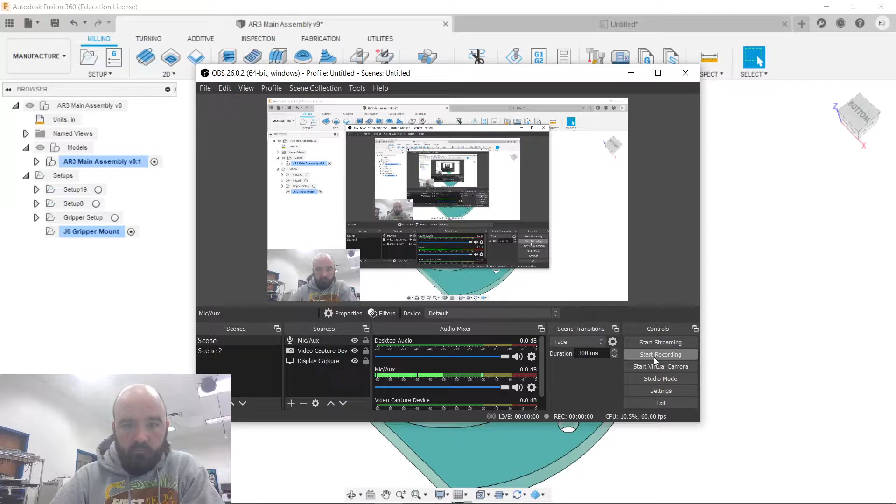All right. So what I'm going to try and do here is take a part from the body as designed to a toolpath that we can run in one of the mills. I'm going to try and do it all in one shot, all in one take. Here goes nothing. So we have a part here from the robot that we're building. This is the J6 gripper mount.

You can see that there are some features that are all accessible from the top, but there are 2 additional holes that we're going to have to go back and do in an entirely different setup. What I mean by setup is we're going to clamp a piece of raw stock into the vise, and it's going to be in this orientation with the tool working on it from this direction. So we will not be able to reach those holes on the side.

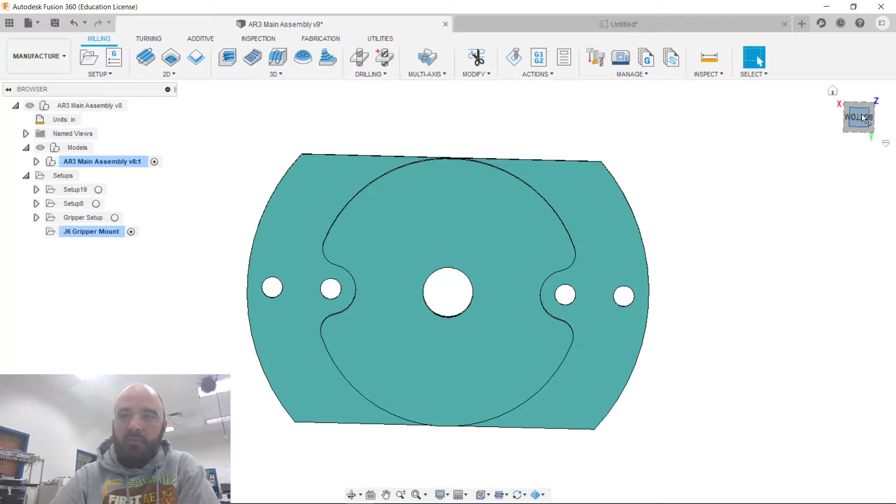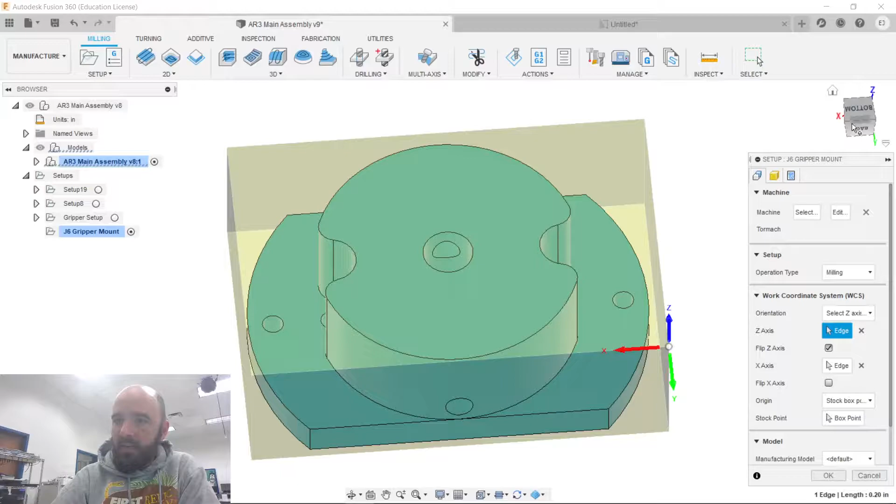So while we're talking about stock, in the setup, if we go over here to this little folder in the manufacture tab, there's a little button that says setup. So we created a new setup. I named it J6 gripper mount just so that we wouldn't lose it. We have to select a machine, the operation type. The machine I have saved in this computer as a Tormach, because that's the one that we're going to be using today.

Running down through the options here. The Z-axis, which is this blue arrow, we want that to be running up and down. We want that arrow to be pointing up specifically. The X-axis, we want to be pointing to our right, and the Y-axis, we want to be going away from us. So all of those things are correct. We want the origin. I like to put it in the back left corner. Some people work from the center. I like putting it on the stock box at the back left corner.

So the stock that we are using, and I know you won't be able to see too terribly well in the tiny little talking head in the corner, but there's a little piece of stock that I have already cut to roughly the correct height. So we know we're going to go to stock, which is the yellow thing. I'm going to go to fixed size box, and we're going to put in these dimensions.

So the X, let me put my phone on vibrate here.

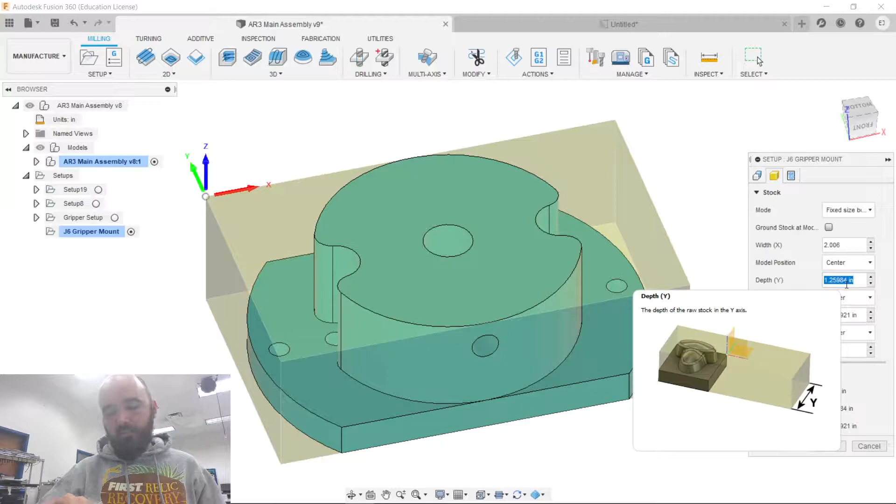The X dimension is our left to right dimension. So I'm going to measure that with our calipers, make sure that they're zeroed first. So the calipers are zeroed. And going left to right, which is going to be this way, we have a measurement of 2.006. So I'm going to put that in here, 2.006. The depth, which is our forwards and backwards position, we have a measurement of 2.062. And finally, the height, which is our up and down direction, we have a measurement of 0.976.

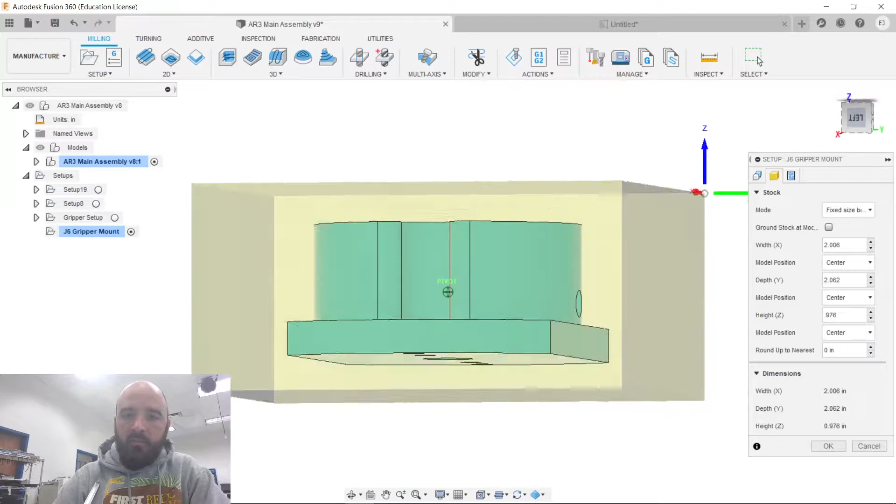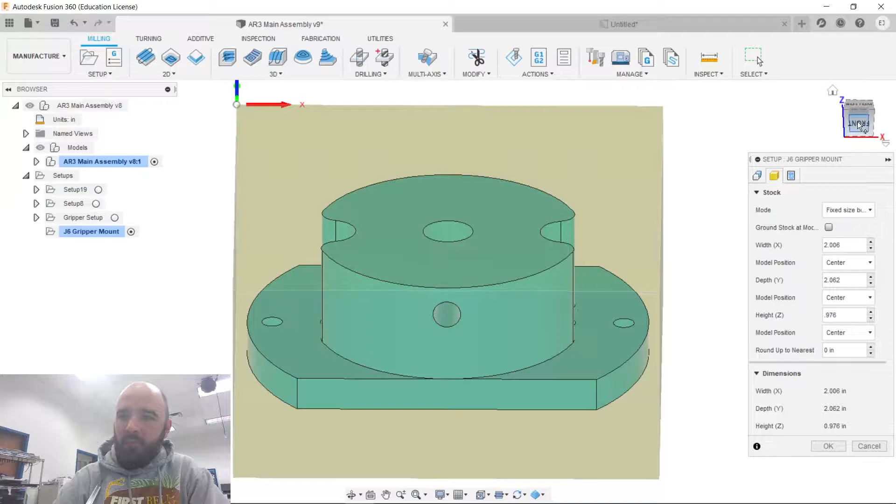Okay, so that gives us the outline of this block of plastic that I've got in my hand. So you can see we've got some extra plastic, a little bit wasteful on this particular one, but that's okay. It's going to be entertaining to do. So what I want to do on this one, I'm fine with its X and Y position. That is, it's centered. Model position is listed as center on the X and center on the Y. I'm fine with it being at the center of the part, but I do want to raise the model up in the block.

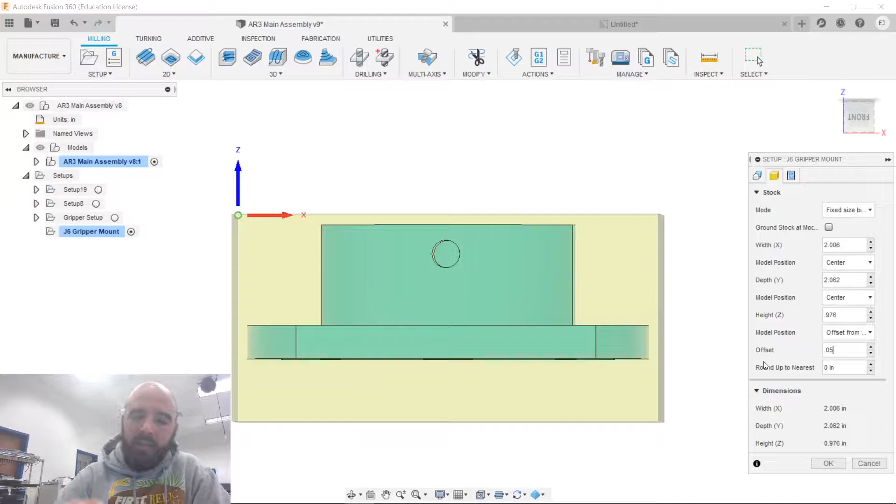So looking at it with our X-ray vision, I want the part to be more towards the top of the block than it is towards the bottom of the block. That way I'm not doing any machining operations really close to the vise. So on the Z, we're going to tell it offset from the top. And I don't know, 20 thousandths, 0.02. Why don't we do 50 thousandths? So 50 thousandths of an inch is 0.05. So that's going to move our part closer to the top of this block of material.

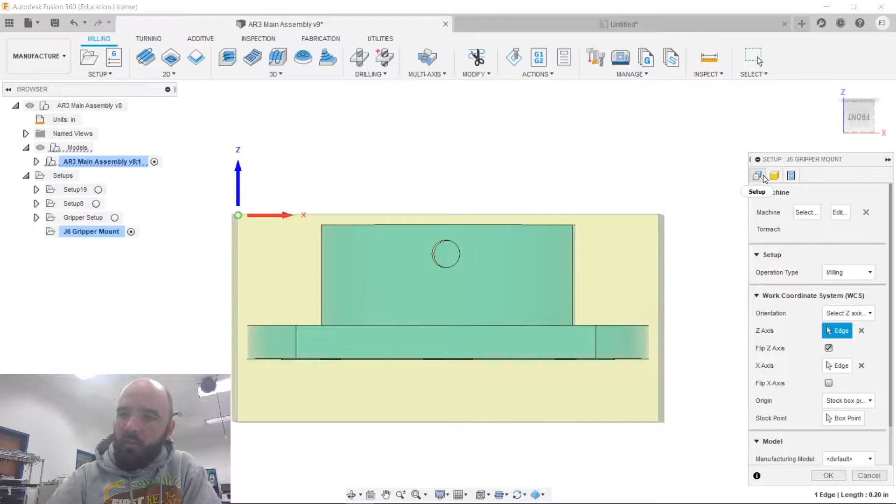What that's going to do is keep the cutter away from the vise. We can stress a little bit less about crashing the tool into the vise. Our third option over here is post-process. We really don't need to mess with this. This is program name and number, program comment, and then which work offset we're using. We're just using the default work offset, so that's all okay. So we're going to hit OK on this.

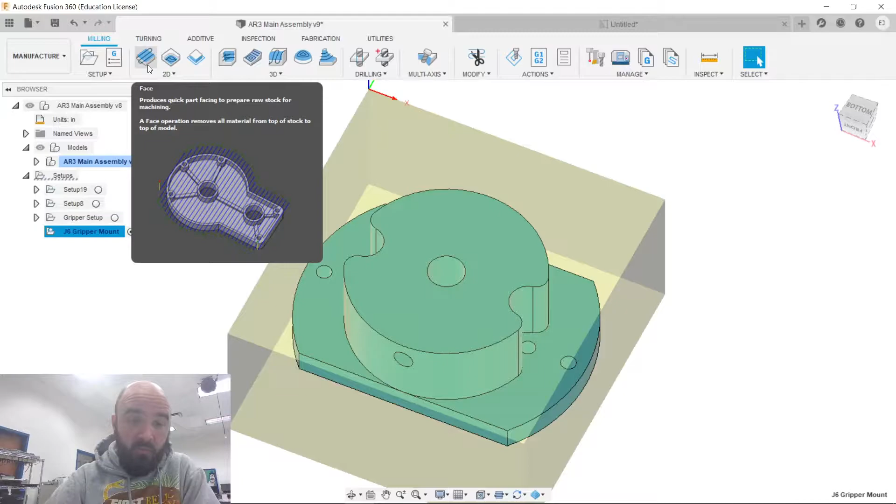And so now we need to figure out how we are going to get all of this extra nonsense away, how we are going to get our part out of here. So the first operation that we're going to do is called a facing operation. And if you hover over any of these buttons in Fusion 360, it gives you a tooltip. So it produces a quick part facing to prepare raw stock for machining. A facing operation removes all material from the top of the stock to the top of the model.

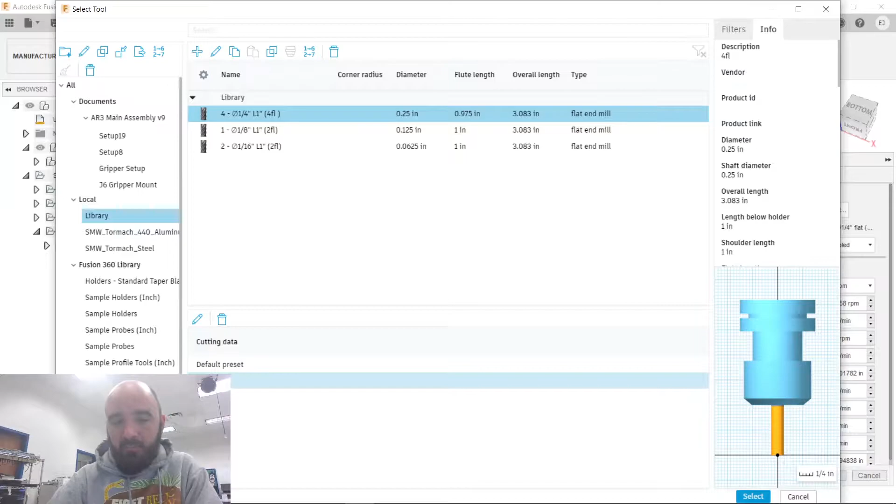So I'm going to make a new facing operation. Running down this list, we're going to select tool number 4 because that's what's in the milling machine right now. I have that saved in Fusion as number 4, and I have it saved in the mill as number 4. I also have a cutting preset for Delrin, which is this plastic. So that gives us all of our information, speeds and feeds, and how fast it should be turning the spindle.

Notice the spindle should be spinning at 5,729 RPM. It should be moving at a surface speed of 375 feet per minute. I'm going to change this ramp spindle speed. I need to change that in my defaults because I noticed that was lower than it needed to be. So what I'm going to do is come in here to my presets and ramp spindle speed. I think I'm just going to make that 6,000.

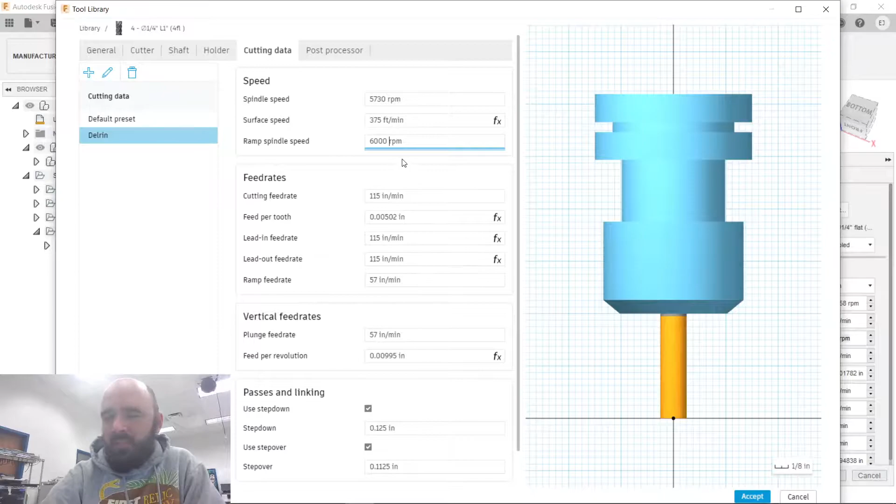So the ramp spindle speed is when we're not cutting, we're not doing anything, and we come down and contact the part. For some reason I had that set lower, so it sounded like the machine was bogging down when we went into a plunge cut. So I just made it a little bit higher, so it's going to spin up a little bit faster before it plunges. Now, if you make a change to that default, Fusion wants me to reload the tool before it saves that ramp spindle speed, but I can change it right here.

So all of this is calculated on one of the online calculators: feed per tooth, lead in feed, lead out feed, ramps, feed per revolution. Everything is set up. I do have coolant disabled, so it's not going to spray coolant everywhere. So now we can go to geometry. I believe, if I'm correct, I don't have to select anything.

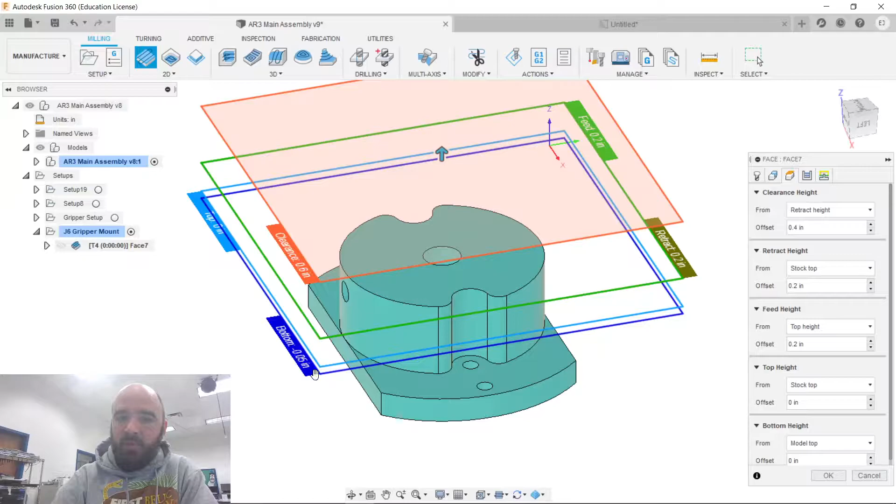Our heights: we have our clearance height set at 0.6. We have our feed height set to 0.2, our retract set to 0.2, and our top of our stock is 0 inches, which is where we're going to set our Z0. And the bottom of this cut is negative 0.05, which is 50 thousandths, where we placed the model inside the stock. We can do this all in one pass. It's not a big deal. So we're going to hit OK. Now it's going to automatically generate the toolpath. And here's our first operation, our first toolpath.

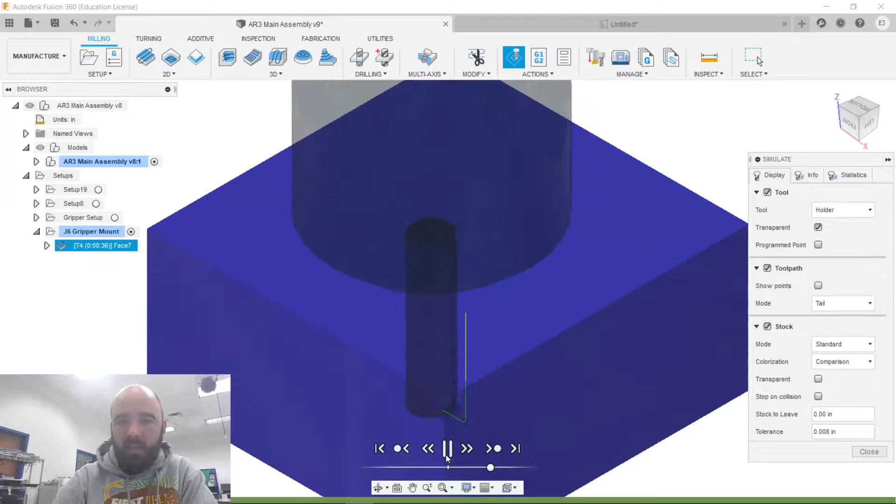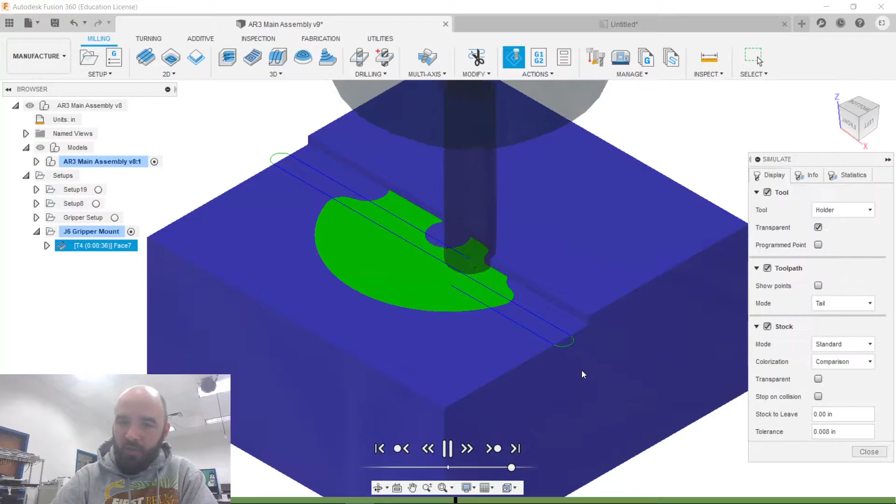So if we want to simulate, we can hit simulate and push play, and it will show us what it is doing. And there's a little slider here; we can drag the speed up. Right now I have the colorization set to comparison. So blue is stock that's left over. Green is final dimension of the part, and red is whoopsie, you went too far. So as we're going through this facing operation, you can see that we're just knocking the top off the part.

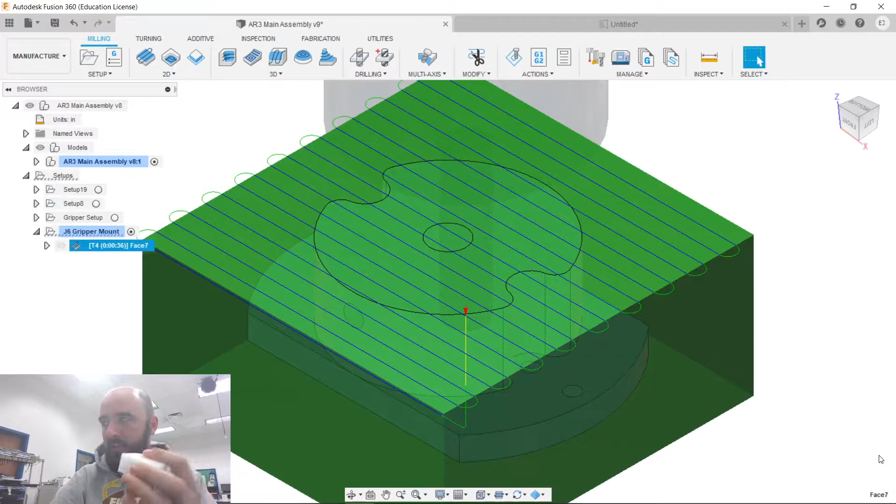All right, so there's the end of our first operation. Now there's also a time listed over here, 36 seconds. So if we'd already faced this part off to our satisfaction, which I actually already have, we could save 36 seconds on this operation by just not doing that anymore. So from the facing operation, we're going to right-click on that.

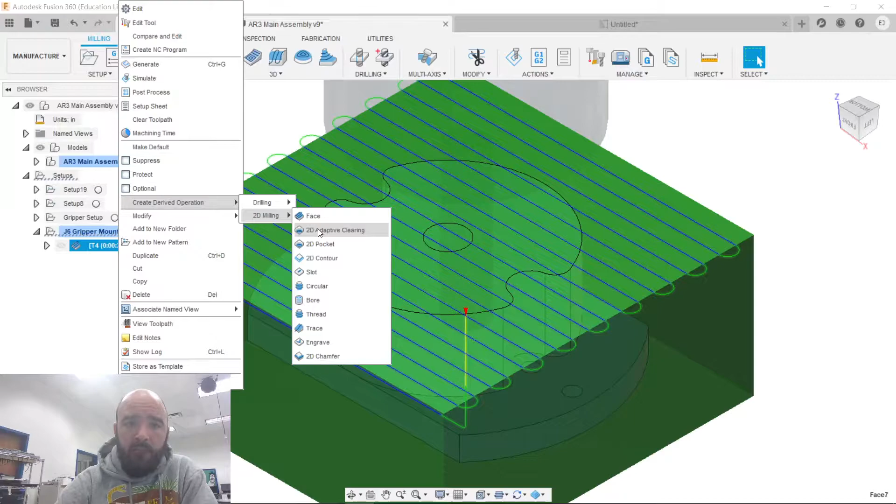We're going to go to create derived operation, and let's do a 2D adaptive clearing. So that's this button here. If we hover over it, it'll tell you it's a roughing operation. Roughing means we're not going to final part. That uses a more optimized toolpath that avoids abrupt direction changes. So we're going to do this 2D adaptive. We have the same tool selected. We have all of the same defaults for our speeds and feeds.

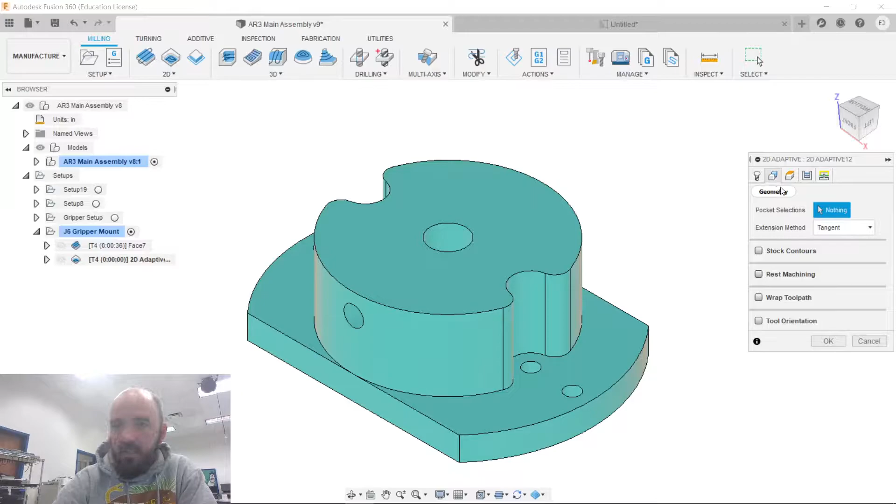For our geometry, we are going to select this. Now you notice this arrow is on the outside of this sort of island in the middle of our part. That's what we want. If we click on that arrow, it switches to the inside, and that's going to cut the exact opposite of what we want to cut. We do not want that.

So there's cutting that. We're going to set our heights. We've got a retract height, or clearance height, retract height, and top height are all defaults. Bottom height is our selected contour, which is this guy that we selected there. Our passes, so how many passes are we going to take? We're going to try and yeehaw this all at one time. Notice the tool tip when I hover over it. Or we're going to try and do it at multiple depths.

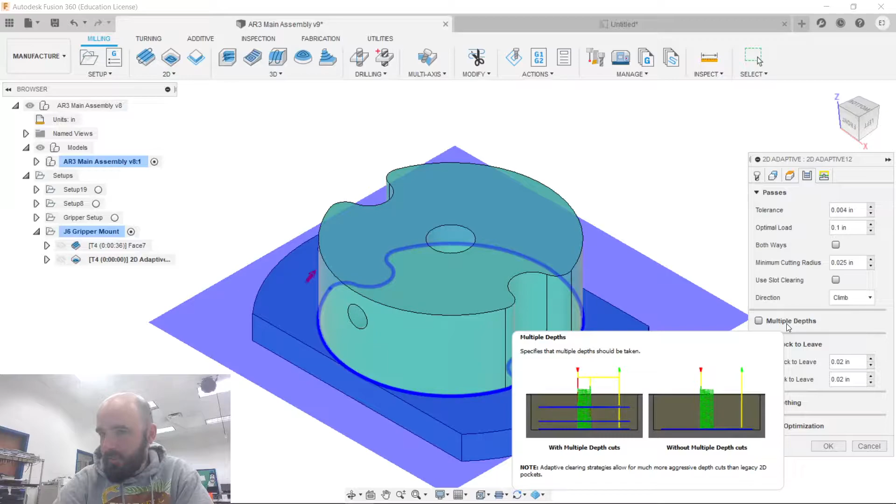Now I know from cutting on this stuff the last couple of days that we can probably hit it all at one time. Out of paranoia, I'm probably going to do it, let's say a 1/4 inch at a time, 0.25. Now we are leaving a little bit of extra stock. So we're going to leave a little bit of extra stock radially. Radially means that we're not going to our final dimension on the outside of this island, but axially we are going to our final dimension height-wise.

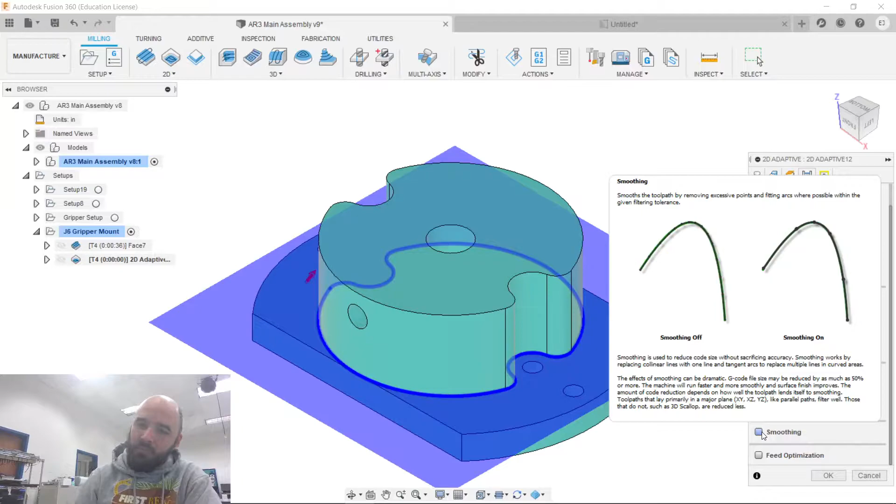Smoothing removes excessive points and fitting arcs where possible within a given filtering tolerance. I don't think we need to worry about that. Feed optimization, feed should be reduced at corners. I don't think we need to do that. So we should be able to hit OK and have toolpath generated, 1 minute, 11 seconds.

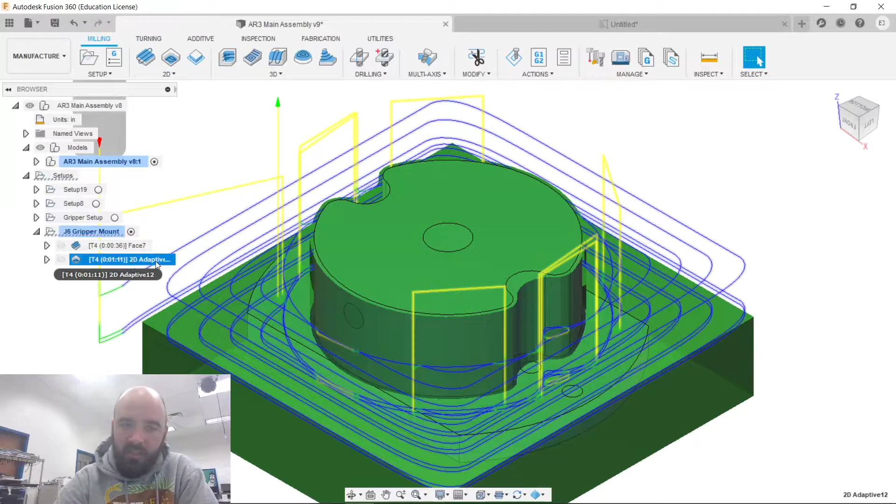And you notice that when we go to simulate, now I have the 2D adaptive selected. So when I go to simulate, it's going to pick up right where we left off on the facing operation. We don't need to watch the facing operation over again. We know what it looks like. So here we go. Yeehaw, going all the way around the outside of the stock.

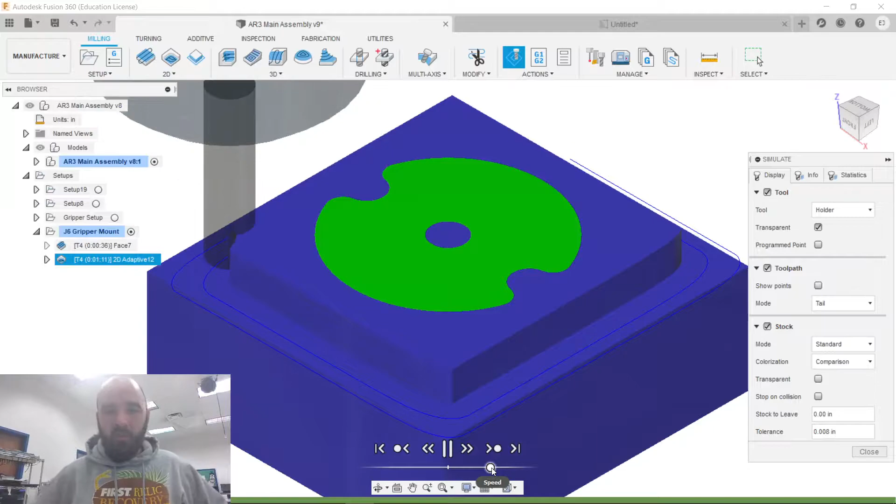It's looking a little jumpy on my computer here. It may be that trying to record this and simulate all at one time might be making my computer upset. So let's give our computer here a little boost while that's running.

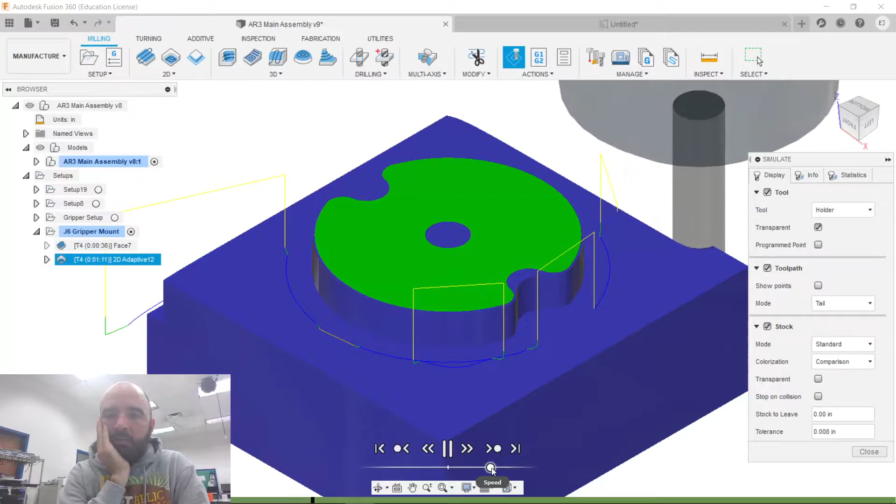Like I said, you notice that we're leaving some meat around the island there so that we can come back and clean that up. With this plastic, I don't know that that's necessary, but when we get to doing aluminum, it's my understanding that that will be necessary. So I'm going to speed it up. Whee!

Okay, so there's the end of that toolpath. So we're down to where we want to be on this. We're to final depth here. We're to final depth here. We still need to trim the outside of this. And I think what I'm going to do is go back and edit this toolpath. So if I double click on it, I can edit this toolpath. And let's go back and let's get rid of that radial stock to leave. Let's just go ahead and make it final size.

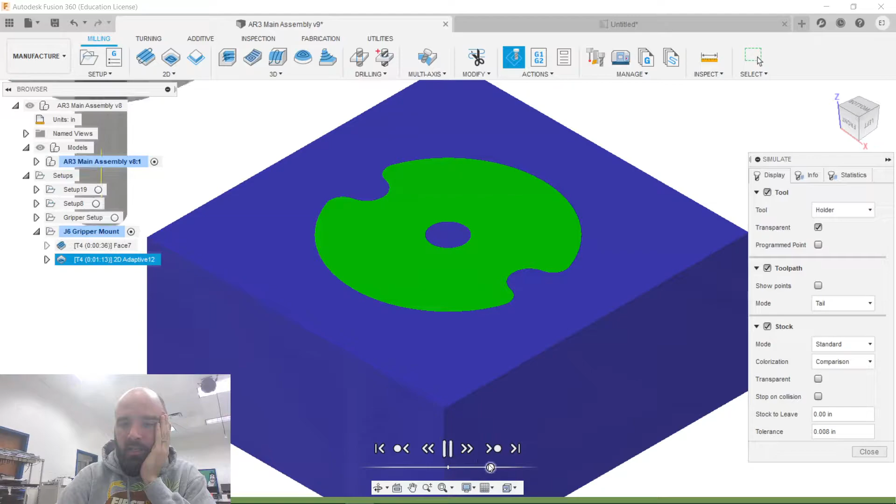So it'll regenerate that path. We can resimulate and play it at super high speed. So now we're to our final size on everything except that little indentation. So we need to figure out, let's go back to hit close on our simulation. Let's go back and figure out why it is that we are not getting.

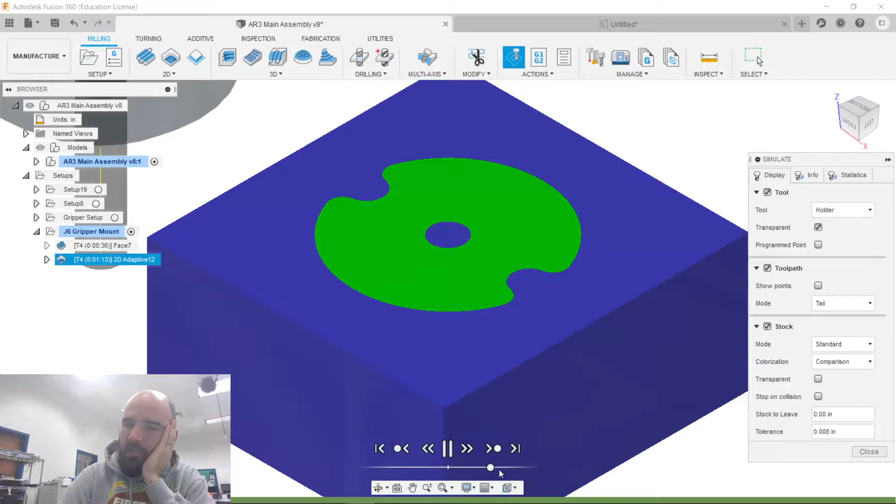So I think this minimum cutting radius... Okay, that's what I thought. So this minimum cutting radius is preventing us from getting to that. So we're going to set that to 0 at the moment. I think that'll be okay. And okay, regenerate. I still think there's a little bit of material in there, but let's simulate and find out. That's the nice thing about these simulations is that we don't have to waste material to find out.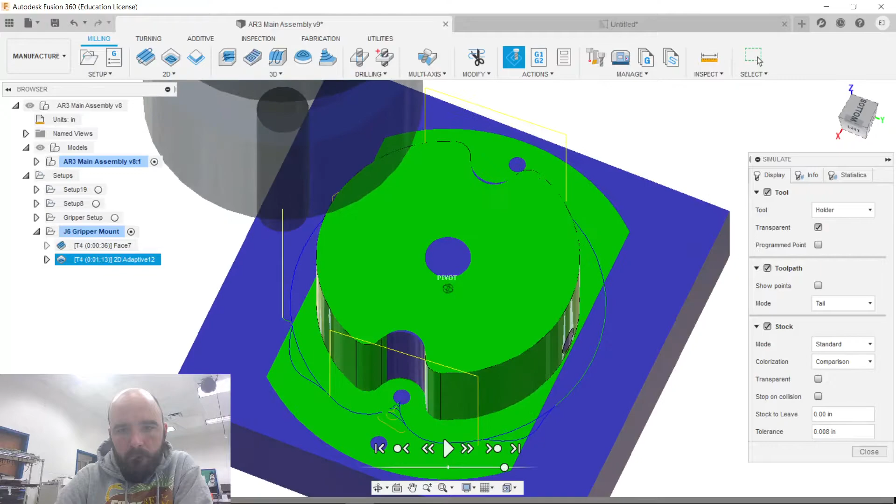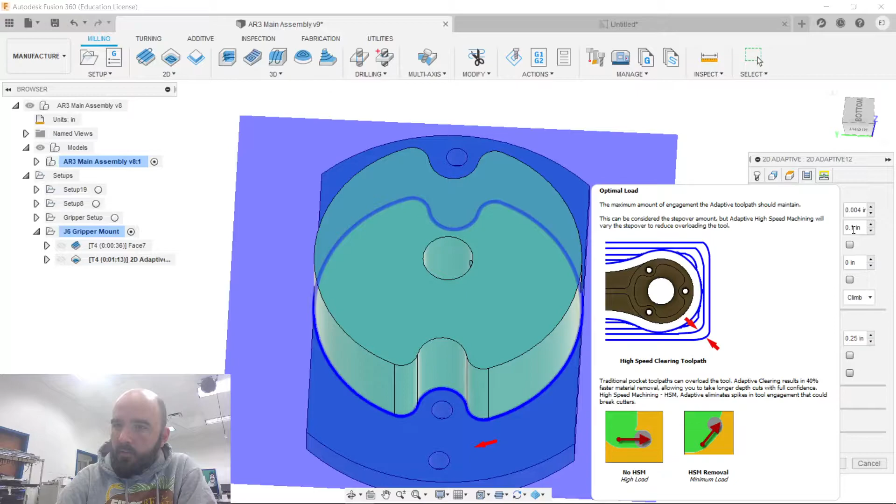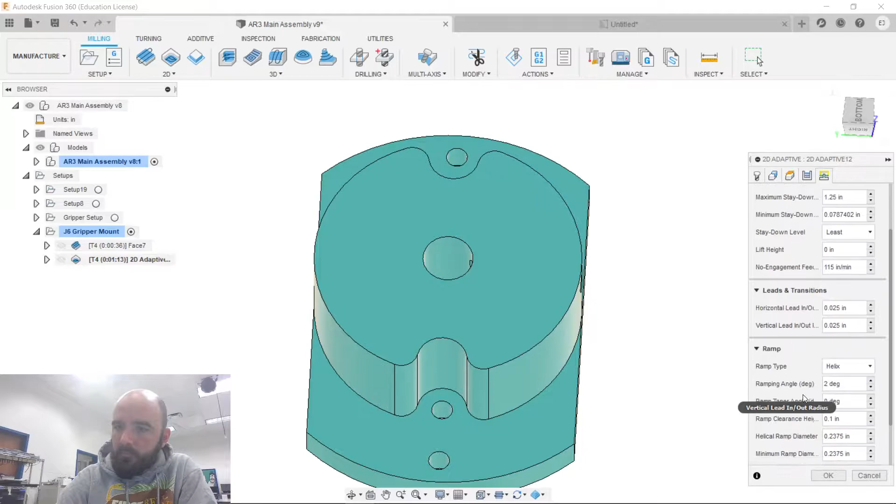So it seems to think that it cannot get into that corner. So what we would do to fix that is switch to a smaller tool. Let's go double check one more time, see if there's any other option we can do. Load. All right, for the moment, we're going to leave that.

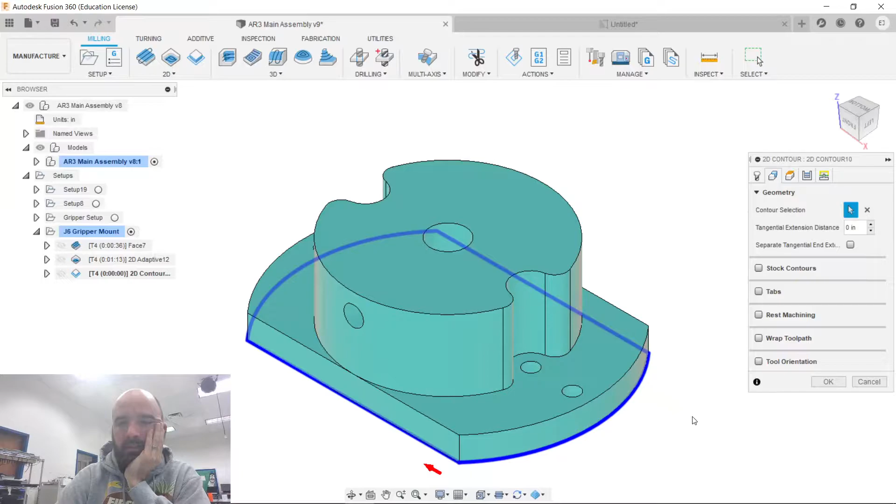So now we're going to go right-click, another derived operation. We're going to do a 2D contour, and we're going to go all the way around the bottom of the part. And I don't know why it has two things selected. We don't want two things selected. I didn't think we did. There it is. Okay. Heights, select contours, passes, and linking. It should just be.

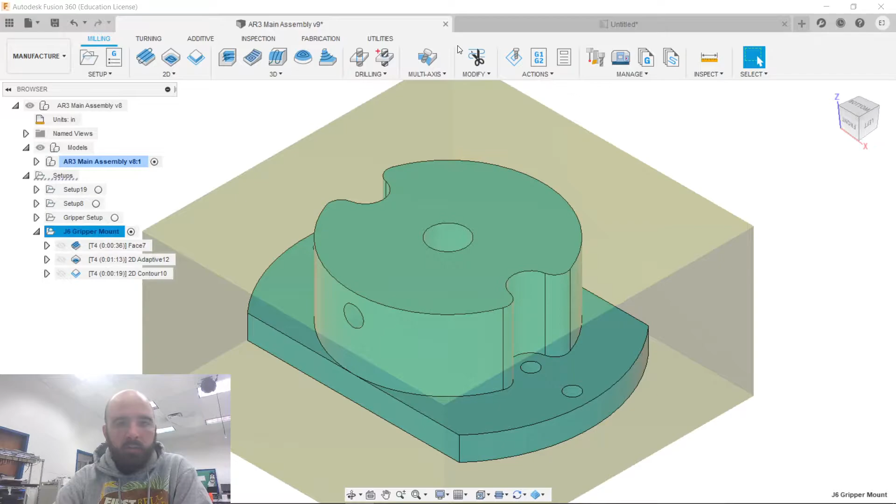So now there is a thing happening here where for some reason it is doing some passes in an area it doesn't need to. So we need to go back into our toolpath and say no, no, no. I think that's in our passes. Yeah, we don't need to do multiple depths because we've already machined that. So let's start all the way at the beginning and go to simulate. Play it at super high speed. Still not happy it's leaving that little piece there, but we'll deal with that.

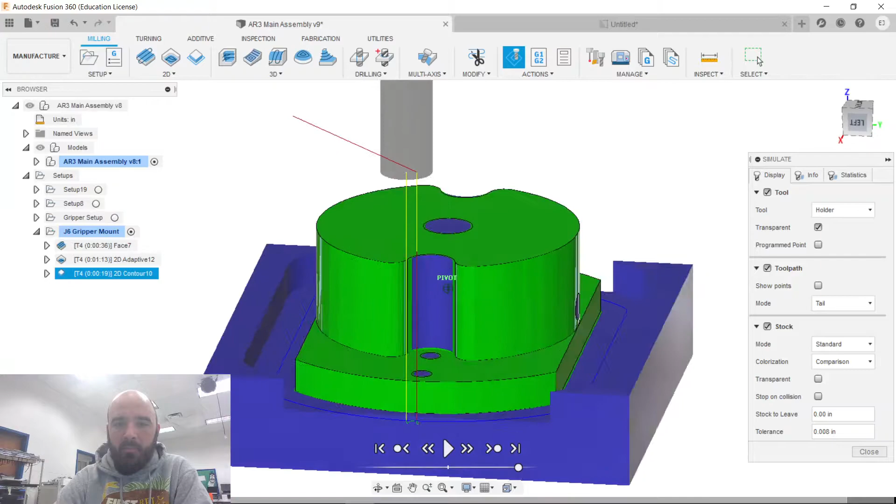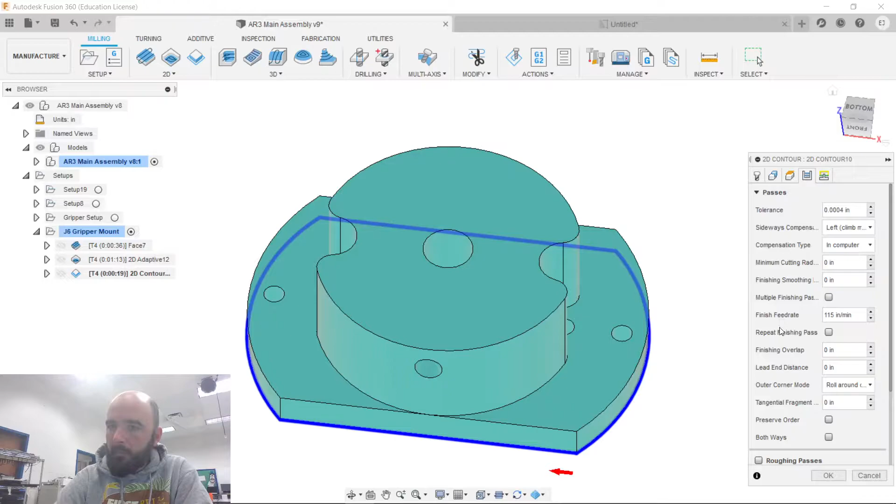So now we have cut all the way around the part. We need to double check our axial stock to leave, make sure that it cut all the way down to the bottom edge of the part. So we're going to go back and check that, and then we're going to see what we can do about these holes that need to be drilled as well. So let's go back to our 2D contour, make sure that we are not leaving any stock. We are not. That box is unchecked, so that's okay. Still not happy with this.

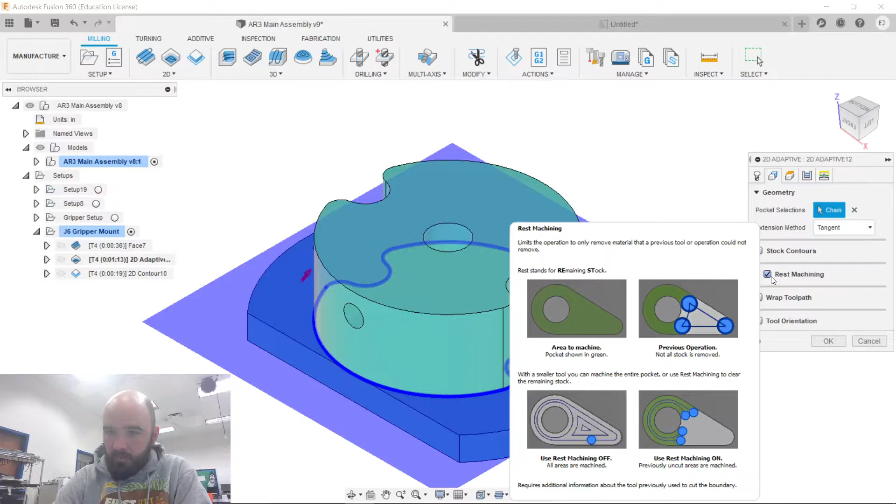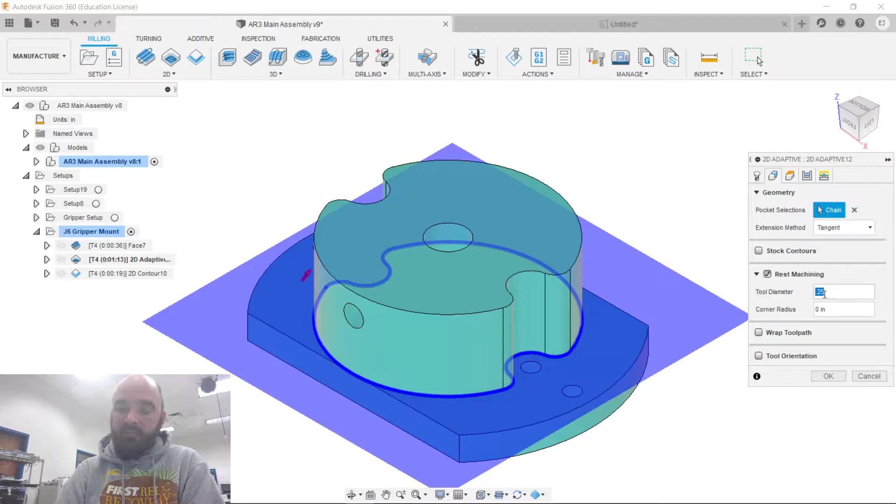So there's an option in here called rest machining, which limits this operation to remove material that a previous tool or operation could not remove. So if we go and add a... if we go and tell it that we previously have cut this with a 1/2 inch or a 1/4 inch thing, which is what we have in there.

So we would need to add another tool change, go down to a smaller tool, which I probably will do just to get those knocked out. So we have a facing, a 2D adaptive, a contour. So we're up to maybe 2 minutes on this part. So let's see, we need to deal with these holes.

So this hole here in the middle, if we go to inspect, click on the tape measure, click on the hole, it'll tell us that the diameter of that hole is 0.236. The tool that we are using to do all this, tool number 4, is a 1/4 inch end mill, which is 0.25. So our 1/4 inch end mill will not cut this hole. The end mill's too big. So we will have to switch to a different tool to handle that hole.

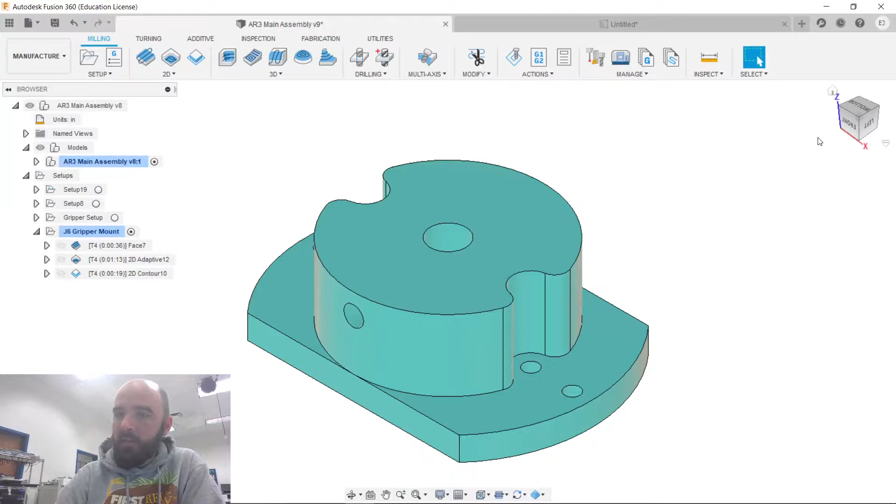This one, let's see, give me the hole. All right, inspect, select the hole. It's a diameter of 0.098, so obviously we can't do it with that tool. So we're either going to have to switch in some drill bits or switch into the 1/8 tool. And while I'm thinking about it, the 1/8 tool, if we convert 1/8 to a decimal, it's 0.125. So the 1/8 tool will not drill this hole either.

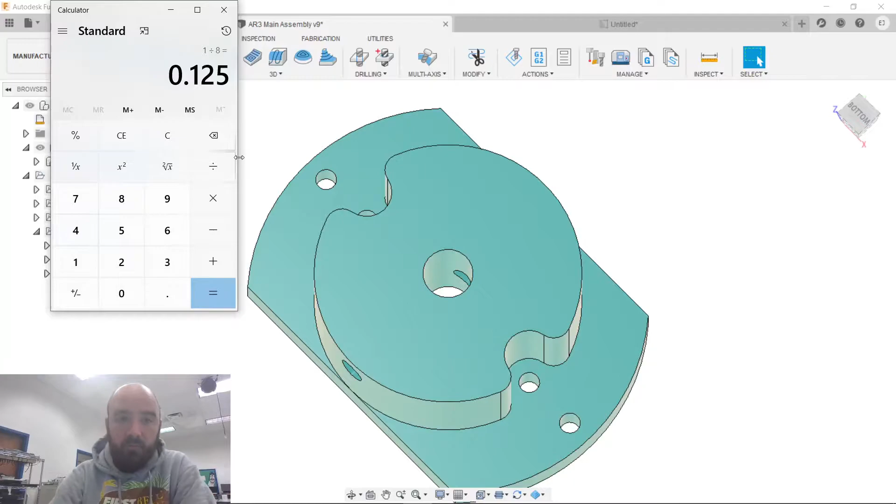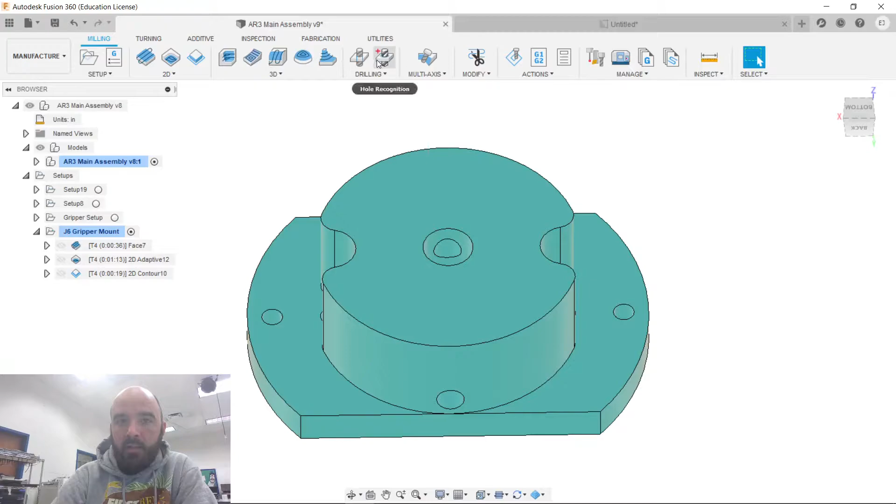So we're going to have to switch over to a drilling operation in order to make that happen. And we have to pull out some drill bits anyway to do this thing. So let's add an operation. So if we go over here to drilling, there is an option here for hole recognition. It automatically finds hole features in any plane and creates drilling operations. So it is looking at these holes, which are 0.0984. So we are going to tell it to simple drill those.

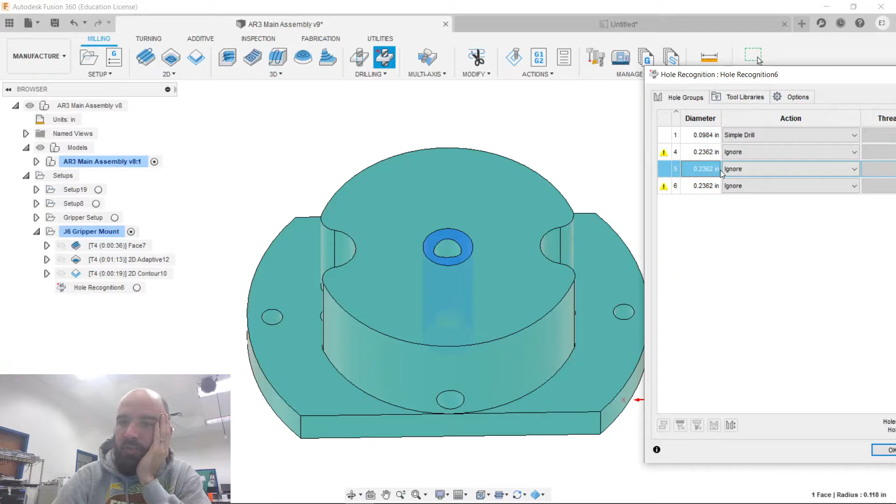This hole number 4, that's not actually a hole, it's just confused. This hole here is 0.2362. We're going to tell it to drill that. And this hole, again, not a hole. So that automatically creates us 2 tool paths. I'm sorry, not 2. Let's see, one here. Where's this one? Oh, it's got a spot drill coming in.

All right, so a spot drill is a super stiff drill bit so it doesn't walk. So we can actually delete our spot drilling operations. We don't need that. Is this also a spot drill? Spot drill, yep, we can delete that. So now we've just got 2 operations, tool 18 and tool 15. So the challenge here is that when we use a drill bit, we don't know beforehand what the length of the tool is going to be.

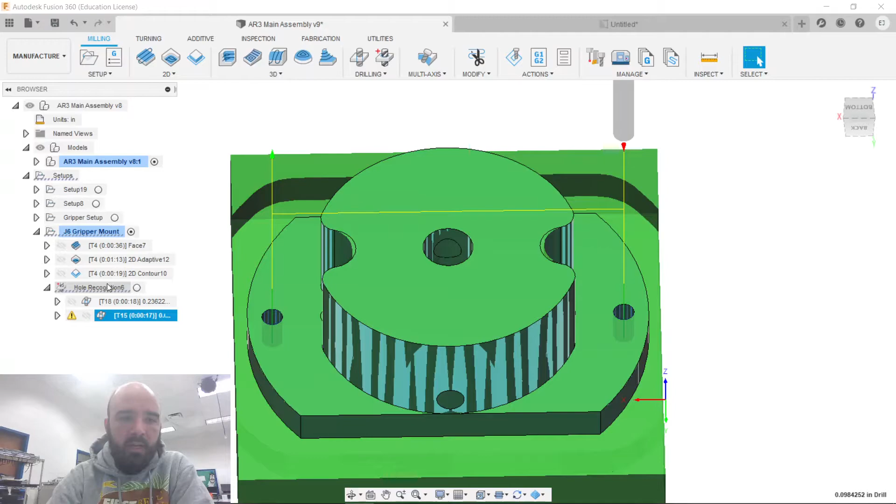So, probably going to save those for later, so let's just delete those. So we're just going to run these 3 operations on this block of plastic and go from there. And then I can always come back because I know where my origin is. And actually once we are to this point, we can reset our origin to be at this back corner. This hovering origin up here is where the origin used to be. So we have those 3 operations set up.

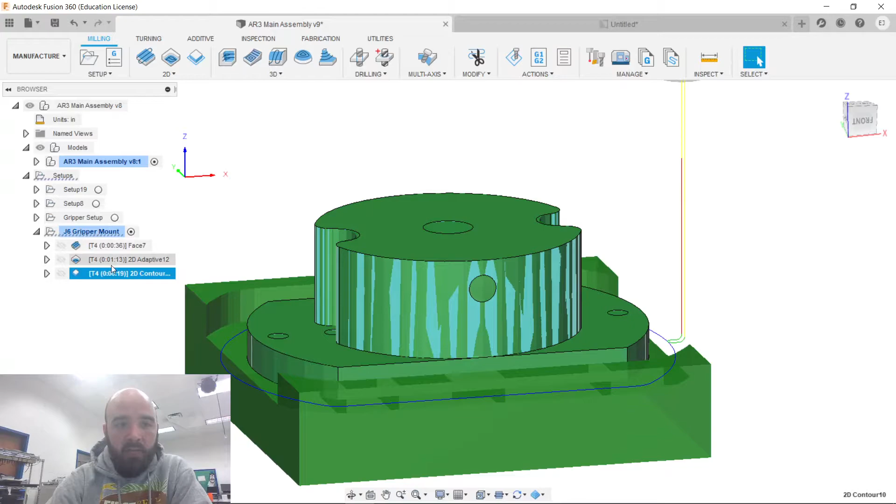We go up here to the G1, G2 button, which is post-process. Post-processing saves those toolpaths in a format that our particular machine can understand. So there is a post-processor already built in for Tormach. So we've selected the PathPilot / Tormach post-processor. And we're going to save it in a folder on my desktop called Annin AR3, which is all the files that I'm using for this robot. It automatically chooses the file extension that the Tormach can understand.

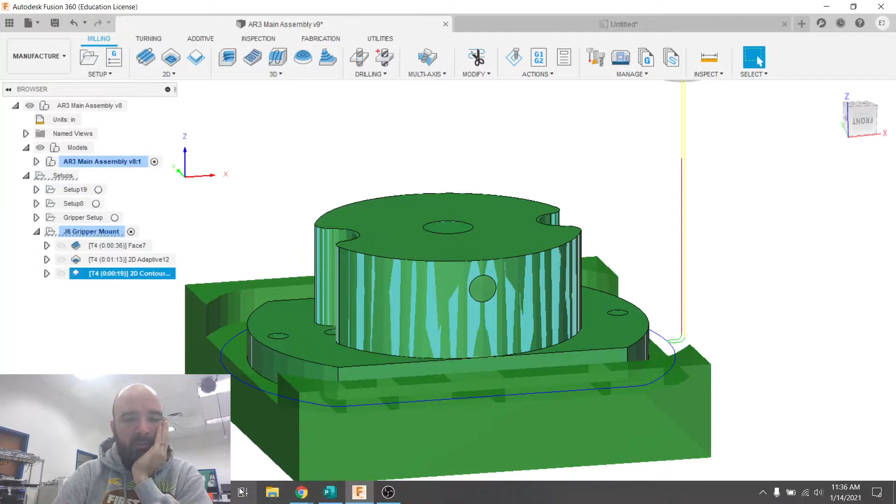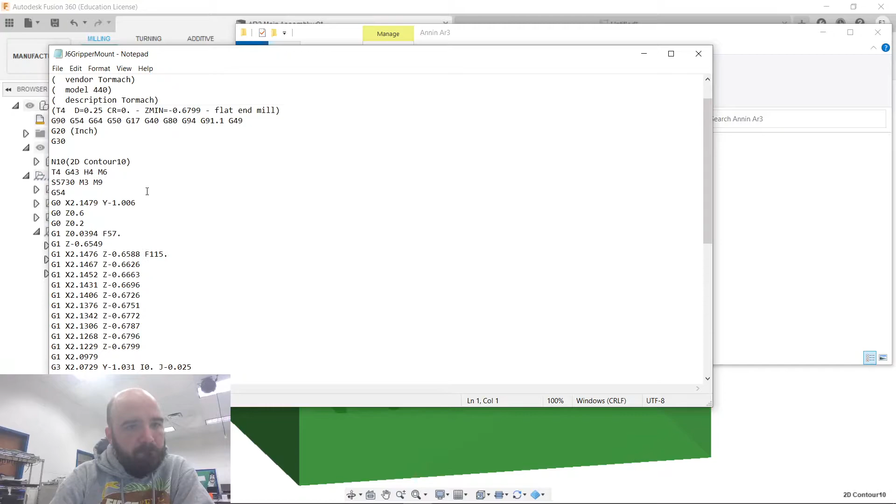Here's our program name. So we're going to name it J6 gripper mounts. And we're going to hit OK. It's going to double check with us and make sure we save it where we want to save it. So now if I go to that folder on my desktop, and then J6 gripper mount. So this is the file that we're going to transfer over to the Tormach. Goodness, it is very short. Here's the 2D contour.

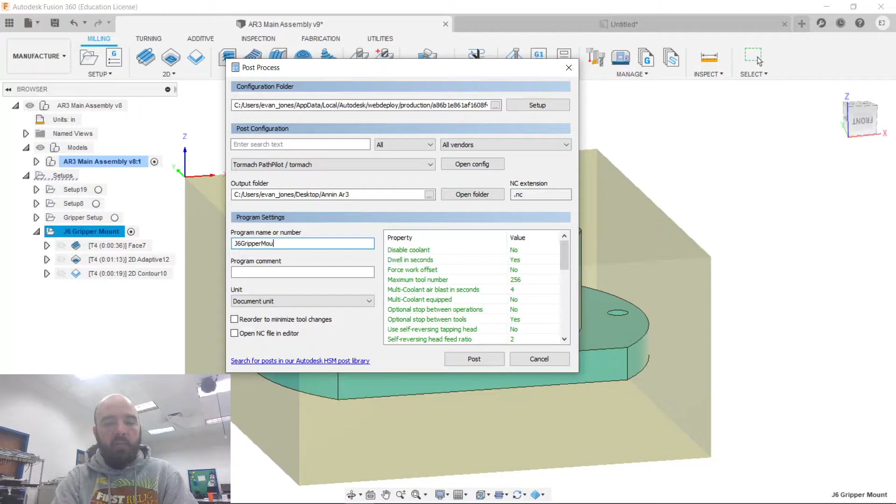Oh, it only saved the one operation that I had selected. There's a goof for you. So let's go, click on J6 gripper mount. Let's do post-process. It only exported the one that I had selected. So J6 gripper mount and post, save. It already exists. Yes, it was incorrect.

Let's go back to here. Open it up. Now we have facing operation. Scroll down. We have a 2D adaptive. And we should have a 2D contour. Goodness gracious, way down here somewhere. So our operations are all in there. Close that.

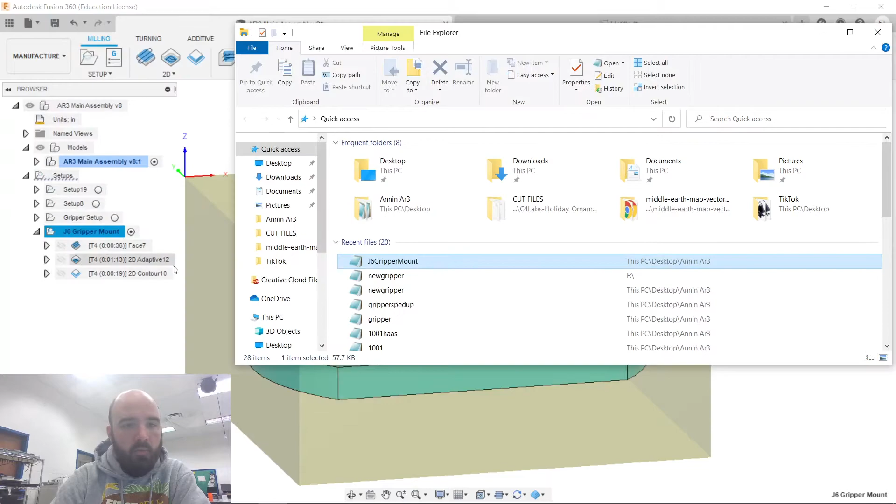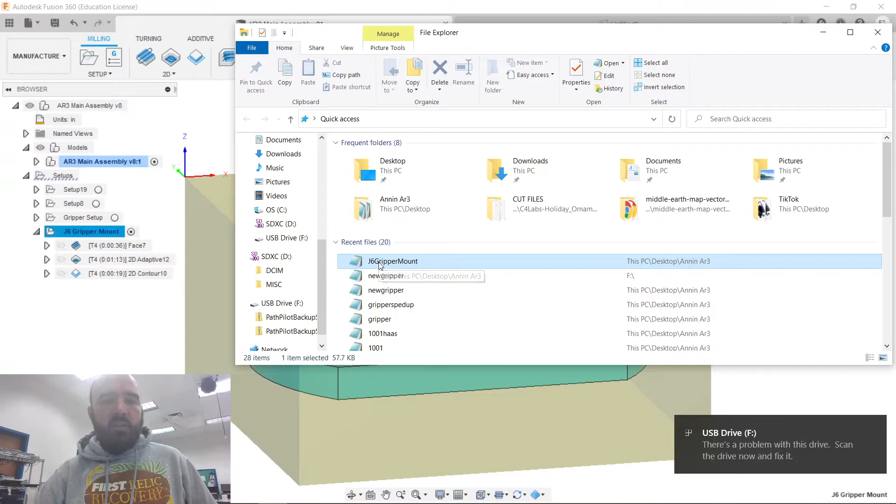I have a USB drive that we only use for the Tormach. It has some of the Tormach updates and things like that. So USB drive says Tormach. It's always said Tormach. Why would you think otherwise? So we are going to send this to there. So now on our USB drive, we have J6 gripper mounts. It's always good practice to eject your flash drive after you are using it.

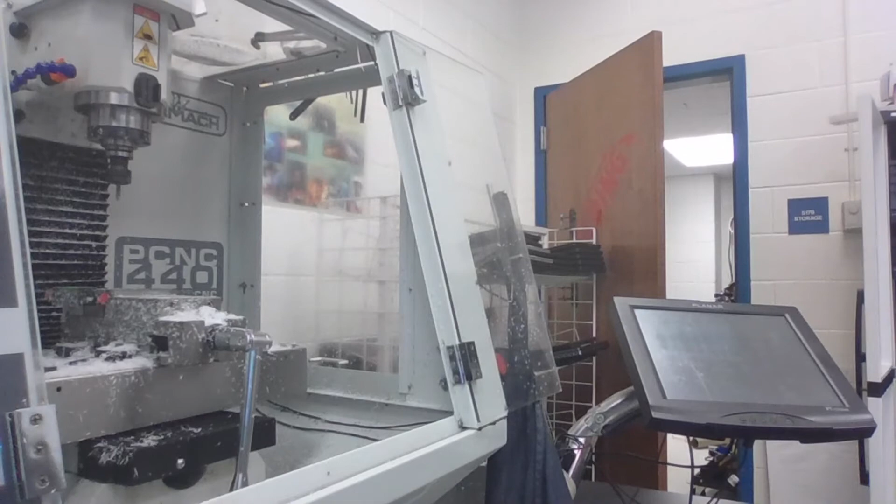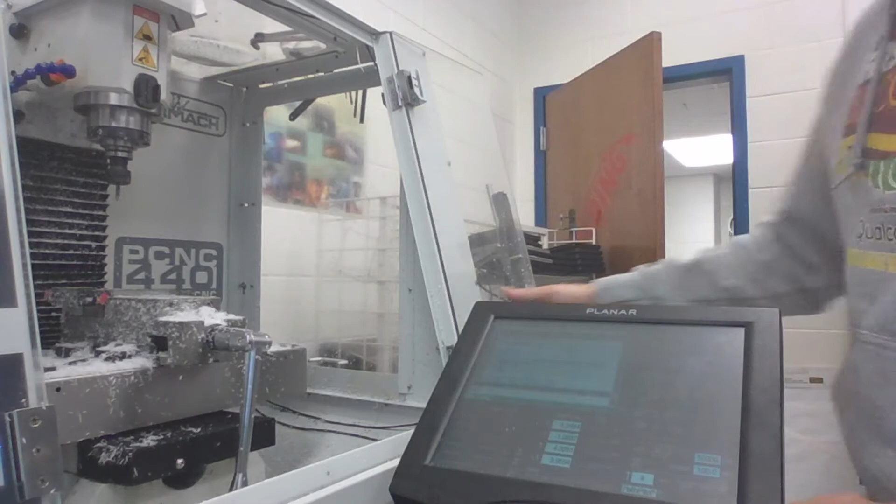All right, so let's switch over so that it is just recording my screen. There we go. All right. You're coming with me. Okay. So the first thing we're going to do is look at PathPilot and look at getting this file into PathPilot, and then we'll get the stock in there and all that fun stuff.

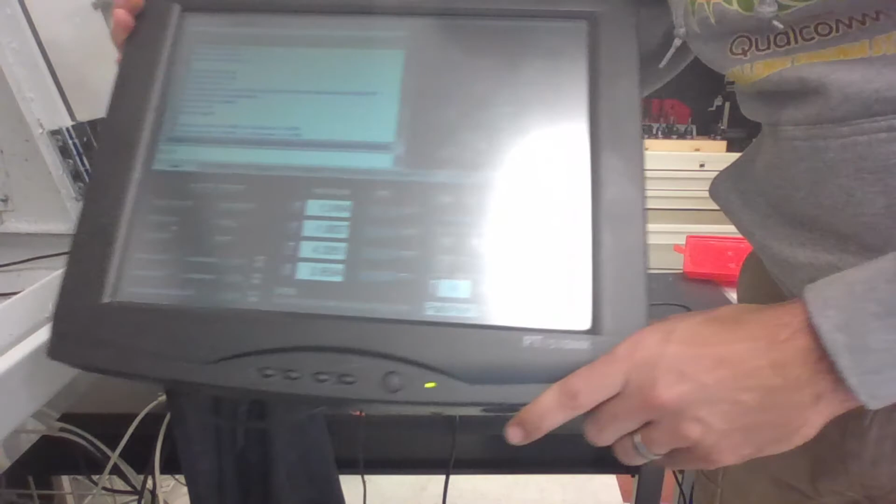I hope that we will be able to kill the glare on this screen. Sort of, kinda. Thanks, fluorescent lights. You're awesome. All right. We'll work with the glare.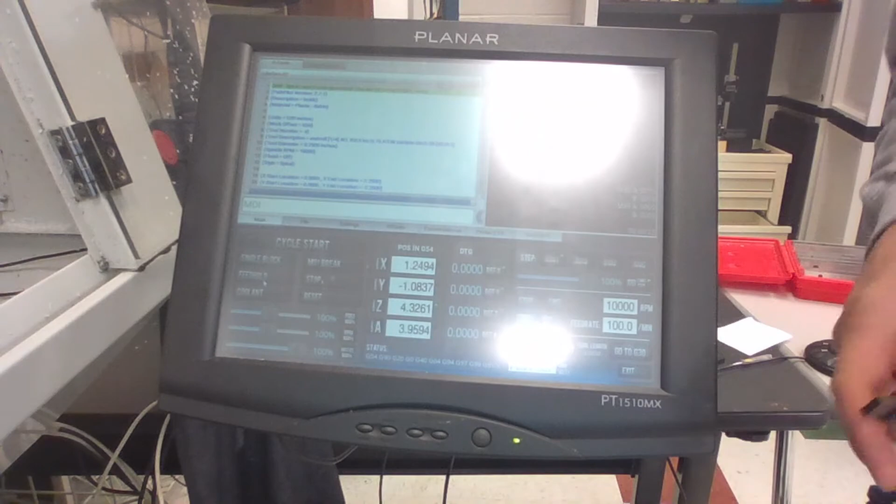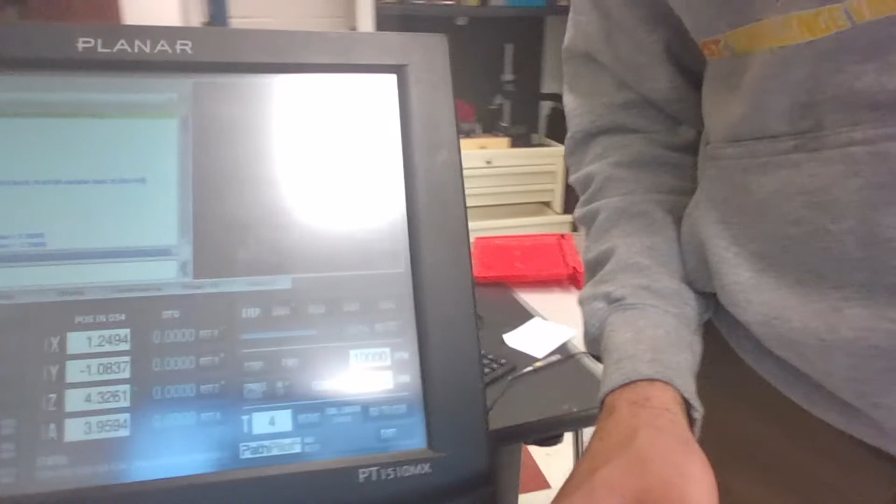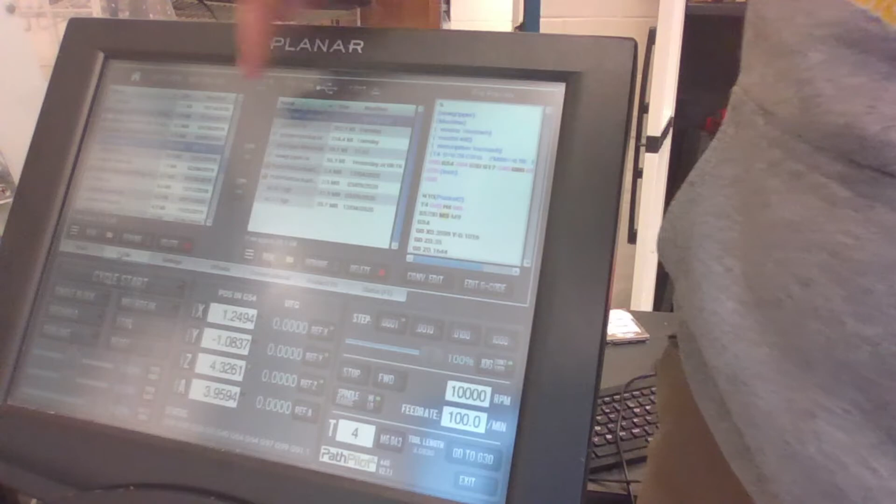It'll be fine. So I'm going to plug the USB drive into the Tormach, into the computer that's underneath the mill. Nope, that made it worse. That's livable. All right, so on our touchscreen here, if we go to File, it's already brought up the USB drive on this side. So we want to select J6 gripper mount. We're going to copy it over to this side, which is the computer or the controller. This is the USB drive.

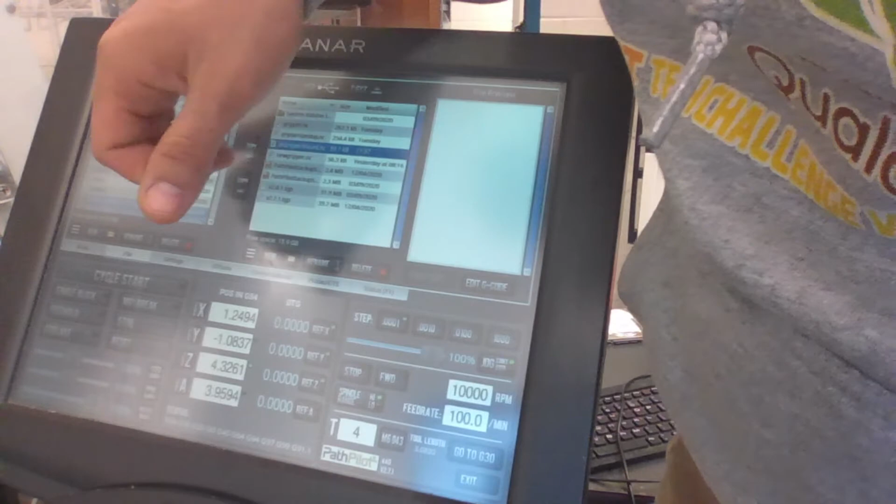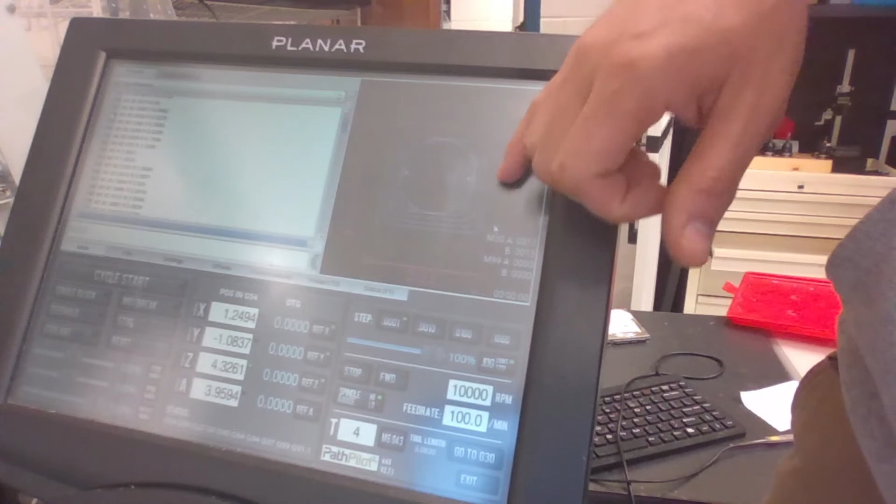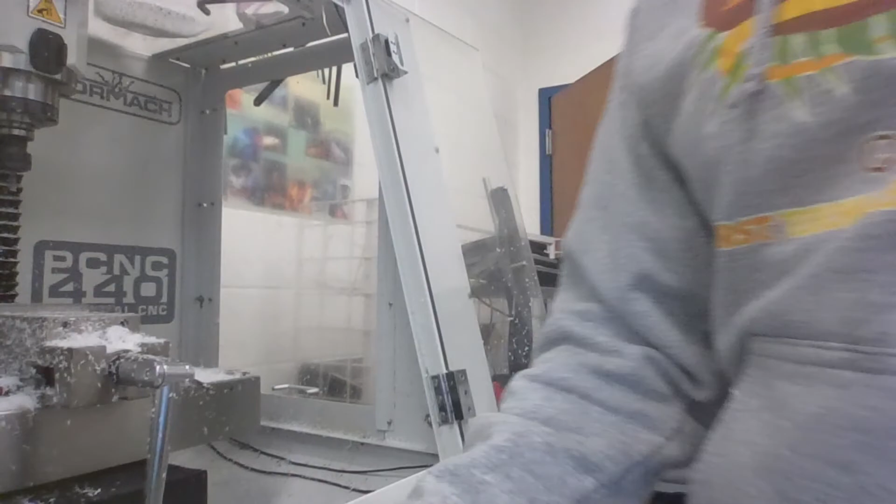So now we're going to scroll down. J6 gripper mount is right here. We're going to say load G code. And here is the code that we made. And you can scroll around on it, look at it. In any case, there it is. So now that is loaded onto PathPilot, now you get to go in the mill. Here you go, come with me.

Okay, so yes, there's chips everywhere. We're going to make sure that there are no chips on the surfaces that the piece of stock is sitting on. So here we've got a set of parallels. I'm actually going to swap them out. Remember, we moved the part further up in the stock so that we wouldn't be getting close to these jaws. That means I can use a smaller set of parallels, and I can get more grip on the stock so that we don't accidentally sling the stock out of there. So make sure my edges are clean, and grab my chunk of stock. Make sure it's oriented correctly.

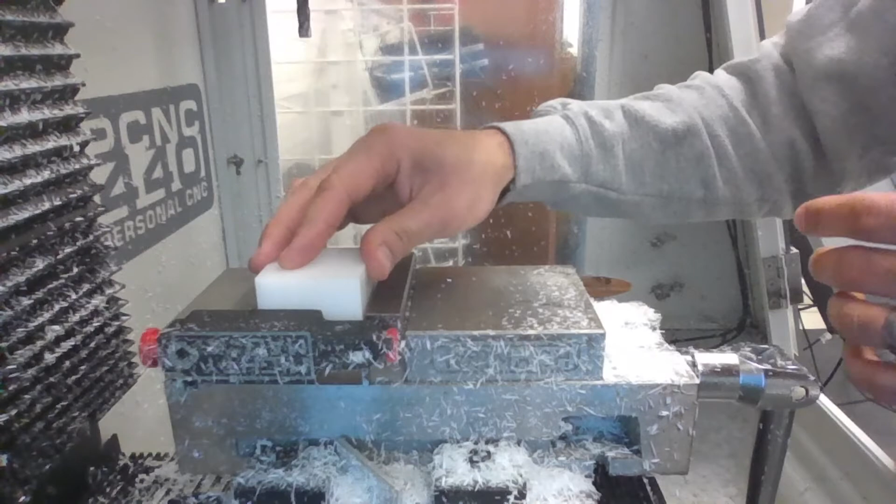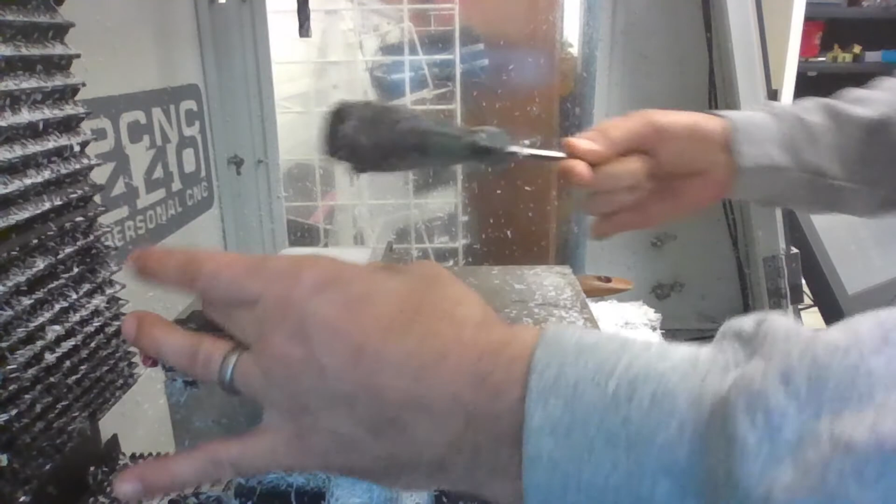So I have set this vise up. I've already set the zeros so that the 0 on the y-axis is the back edge of this jaw back here, and the 0 on the x-axis is the edge of this magnet here. So because we're not doing super precision, I'm not too terribly stressed about that. So I'm going to push this diagonally into that back corner. I'm going to tighten up the vise. Going to use this hammer. Make sure that it's down flat against the parallels, and then give it one little tweak on the vise to make sure that it's going to stay in there.

So we already have tool number 4 installed. It's a little bit out of your view there, but that's okay. Things we need to do. We need to set the Z0, and then we'll do a sanity check to make sure that our X and Y is also correct. So I've got my shuttle here. I'm going to select Z, and I'm going to jog the Z axis down until we're just barely touching the sheet of paper.

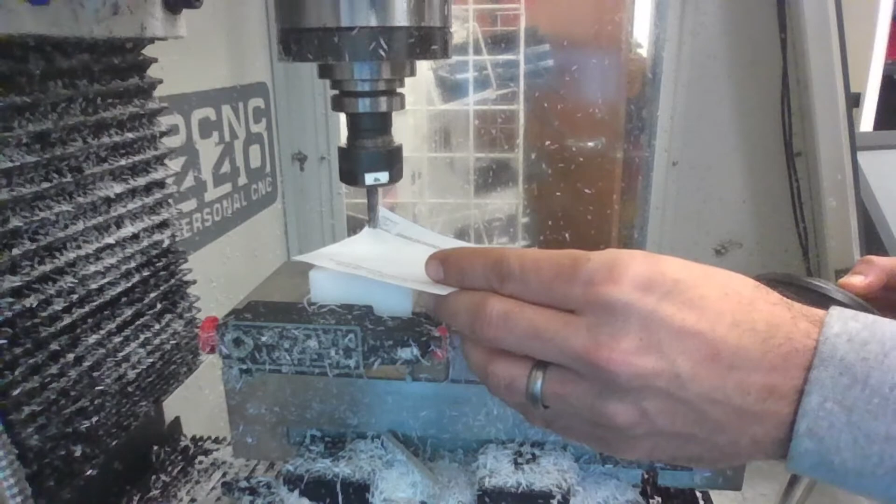So we know that this sheet of paper is 3/1000 of an inch thick. So when we're just barely grabbing it, I don't know if you can hear that on the recording or not, but when we're just barely grabbing it, we know that we are 3/1000 of an inch above the part. So we're not actually touching the part. We're just 3/1000 away. So I'm going to go into PathPilot and tell it that our current Z position is 0.003.

And apparently I need to recalibrate my screen. All right, so our current Z position is 0.003. I'm going to tell our X and Y. So we're going to do G0, which is the command to rapidly move somewhere. X, goodness, my screen has gotten terribly off all of a sudden. X0, Y0. Before we do that, I'm going to move the Z up a little bit.

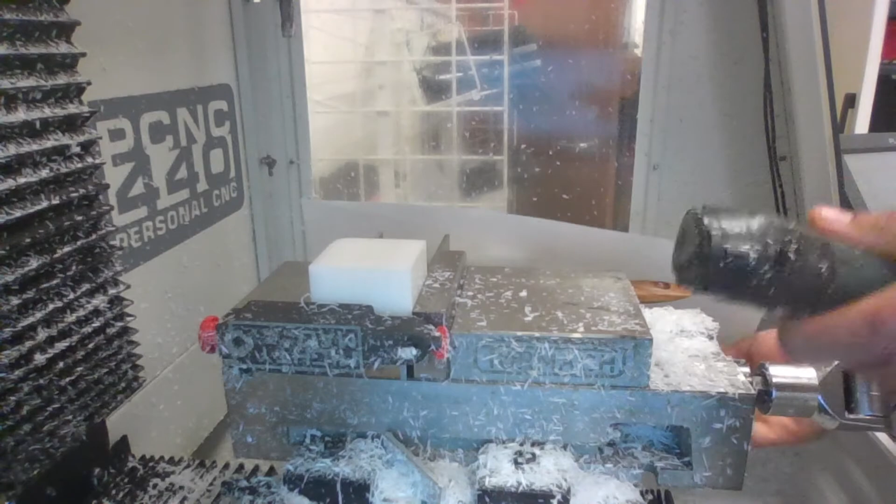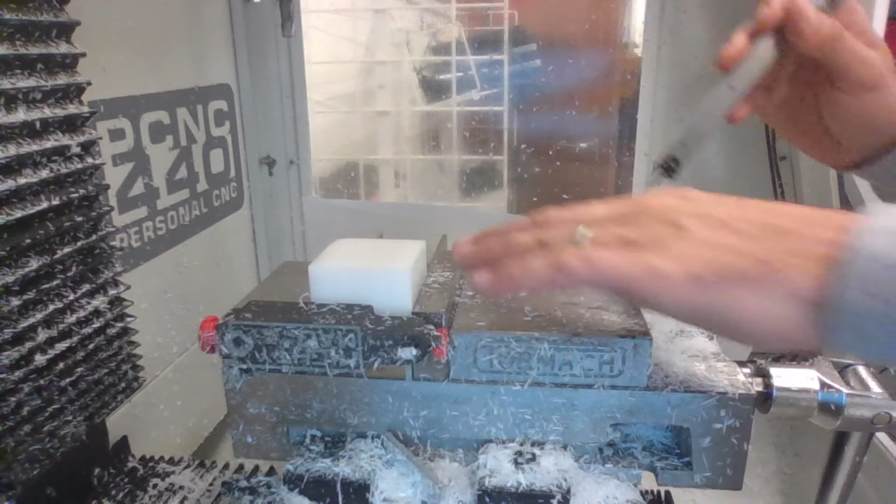Now, I just noticed that one of my parallels is weeble wobbling. I'm going to push this part down just a little bit more. It's touching, just weeble wobble. So, grab my calipers again. We know that the deepest cut we're going to make is 0.68. So we're close. We're certainly not going to hit the vise. If we hit anything, it would be this magnet, and I can slide this magnet down. So we shouldn't hit anything.

Fingers crossed. Get your piece of paper, cover up your keyboard again. Okay, so fingers crossed. I'm going to put my hand on the emergency stop button for no reason at all, and we're going to hit cycle start on the machine. Now, if I was feeling super paranoid, I could put this machine in a mode where it only runs one instruction at a time. And I'll probably do that for the first half a dozen instructions.

So it'll move down to the clearance height and then down to the feed height. Basically, I'll probably have it on single block until we touch the material and we know that we're right on that front, and then we're going to let it rip. So I'm going to close the doors, and we're going to see what happens.

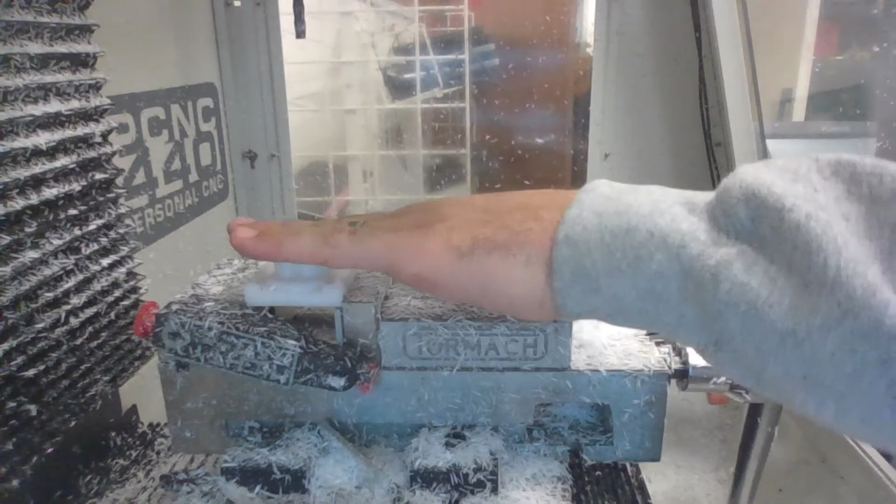All right, so in a little less than 3 minutes, it was actually 2 minutes and 58 seconds, not including my interruption. Now, because we're using a known repeatable origin, I can take this part out because I know that I can put it back in the vise using the edge of this magnet for my X-axis, the back edge of this for my Y-axis, and I know that I use this set of parallels for my Z-axis. So that gives us a part that looks like that.

So we still have to go back and drill the holes that it needs, and then we'll have to flip this part over, clamp it down in the vise, and face the back of it off, but that is another operation for another day. So far, I'm happy with that. We'll pick back up at another time and finish all the rest of the operations.